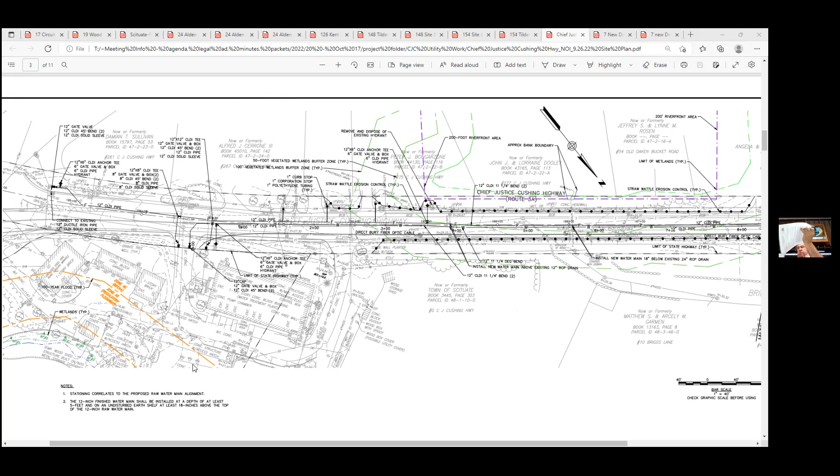So now we are on to Seven New Driftway, I think, and we should have someone from McKenzie, maybe. Yeah, Eric Shoemaker, that's me. Art Allen is also on from our team, and Brad Holmes is on the call if necessary.

We've talked about this quite a bit, so I'm not sure Eric or Art really has much to say at this point, because we've met about this project quite a bit. We were just waiting for the planning board to close in on the stormwater review and get the final tweaking done on some of the final considerations they had. And that has been done. So Eric, you can explain that, but I don't think we have a lot to talk about here. We're really just here to close and talk about some conditions if you want to.

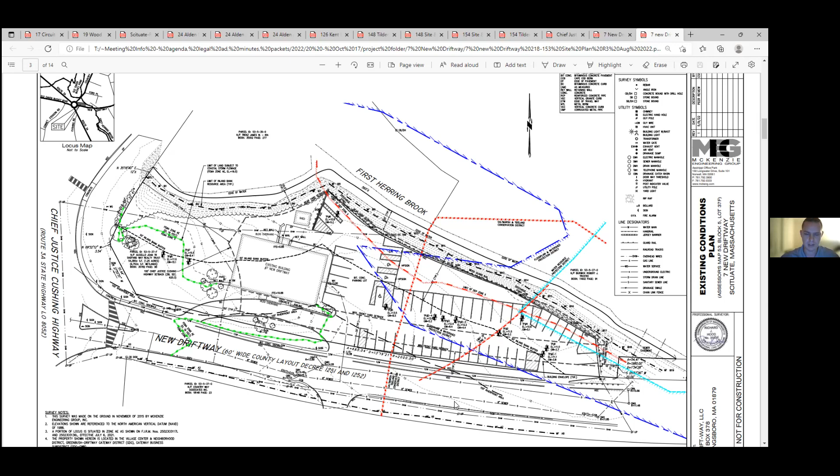Yes, so Eric Shoemaker, McKenzie Engineering. I'm here with Brad Holmes, our wetland scientist, as well as Frank Polak, our client. I just want to provide an update on the project. So you'll see on the next page, sheet C1, the proposed site layout plan, just to catch up the commission members with the changes we've made. This is an older plan, but the changes include level spreaders, which were added to the outlet pipes coming from the rain garden, as well as the roof runoff.

The peer review engineer also wanted that loading space to be 30 feet in length to accommodate a box truck, so that 20-foot striped loading space in the westerly portion of the parking lot was extended another 10 feet into the landscape area adjacent to the patio to accommodate that turning movement. So those were the latest revisions to the plan, and we'll answer any questions and help with the discussion.

Okay. This is going on a while. I don't know, Amy, are you ready to comment? I think Jen was trying to.

Yeah, so my comments are that we've been good with this project for a while. We were just waiting for the stormwater to meet muster with John Chessier's review, and it has, and finally all the tweaks were tweaked, and planning board is getting ready to get a special permit for this project, although my understanding is they have not yet done that, but they're quite close, which is great news.

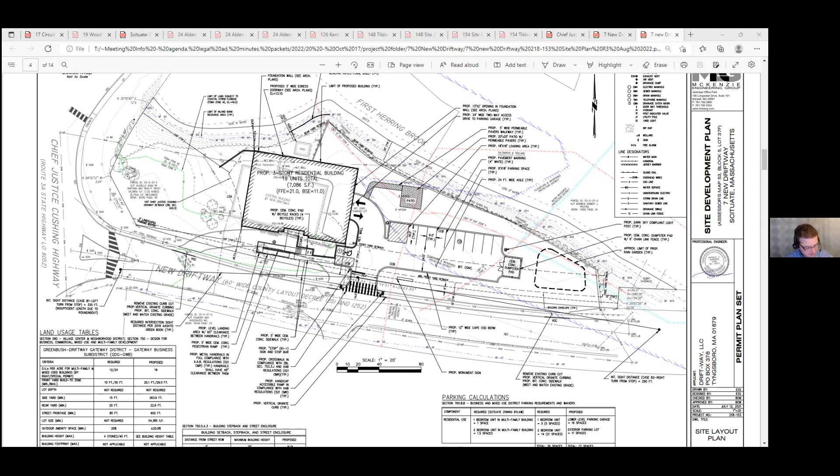Thank you. All right, 19 Wood Island Road. Someone from Cavanaro.

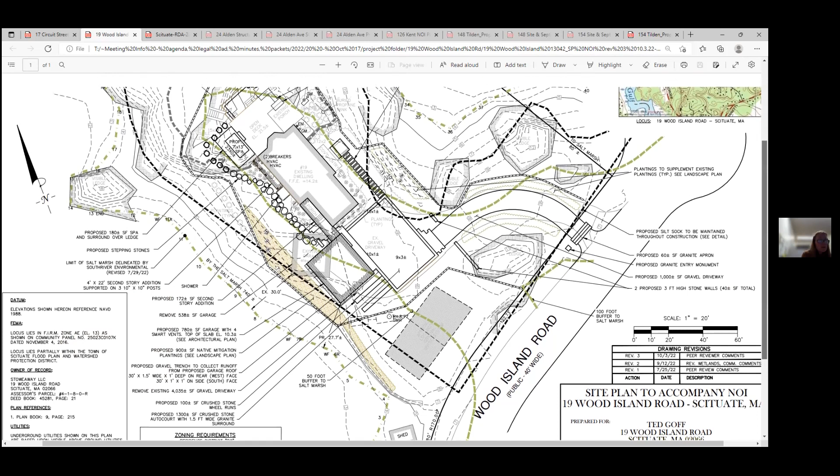We have Caroline on from Cavanaro for this project. So Frank, this project is a continued project also, continued from September 26th, which was continued from a date in the summer, while we've gone back and forth tweaking certain things of this project. This project also has a landscape architect - I'm going to unmute Sean Papich. Sean's on the call. And Art Allen from Ecotech is your peer reviewer, and he's also on the call here. So we'll have Caroline just review what has been done since we last met.

Okay, hi everyone, can you hear me okay? We can. Good evening. Good evening. Just for the record, my name's Caroline Reese, an engineer at Cavanaro Consulting, or now Merrill Engineers. I'm representing the homeowner and applicant, Ted Goff, for an NOI for improvements to a single family home. And I believe Ted may be on the call and may want to participate, at least in the discussion. Okay, so Ted, maybe raise your hand or let us know.

Sure. I don't know if you recall this project that we presented August 1st. At the time we originally presented, there was a comment from the peer reviewer to revise some of the wetland flags or relook at them, and we had not had time to do that. But we did present in August and we're able to get some feedback from the commission, and we've tried to address as best as possible the concerns about work in the 50. So the plan before you is the revised plan.

When we did reflag the wetlands, they did encroach on the developed property more. Now 75% of the lot is within the 50-foot buffer, which is that first thicker green line, and pretty much the entire lot's within the 100-foot buffer. So if you can see, right over the road is the 100-foot buffer. So the area we had to work with outside the 50 decreased.

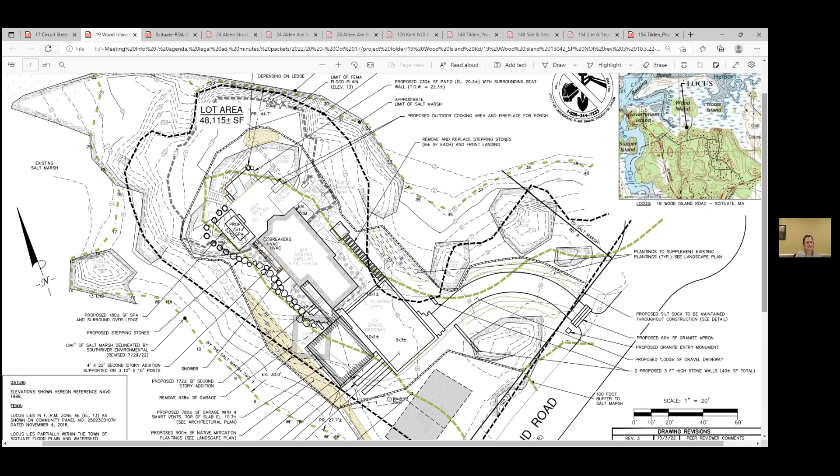We did increase the mitigation plantings just south of the garage to 900 square feet, making a long strip on the south side of the garage as a concession. We also added a gravel trench on the rear and south side, because there are no roof leaders on the garage.

So those trenches would collect runoff from the roof. Another concession: we reduced and changed the auto court in front. It was originally proposed as a 1,900 square foot paved auto court, out of the 50, but we reduced it to a 1,300 square foot gravel auto court with granite slabs around it to contain the gravel, so it lies completely outside of that 50-foot buffer.

The driveway approach is on top of the existing approach, which is tough to see in the light gray line, but it is narrowed to what we feel is a reasonable width. So the existing gravel driveway will be reduced in width and size to approach the auto court.

Another feature the client was really interested in keeping was that patio toward the top, right under the lot area. That's completely over ledge, built on top and over ledge.

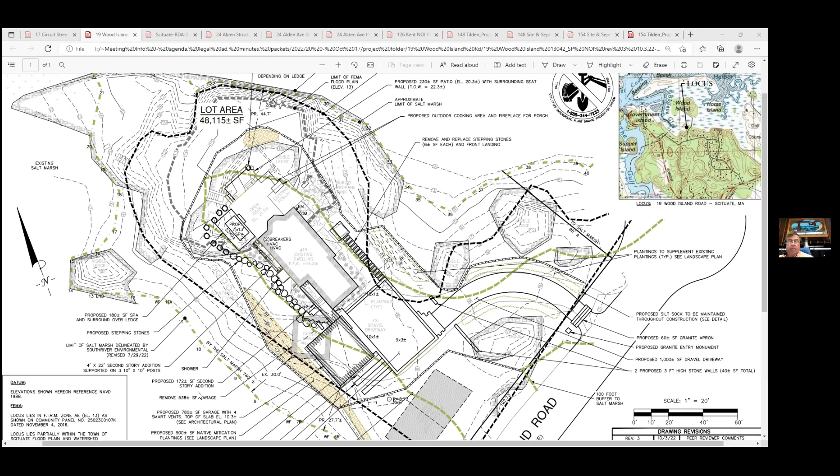Keep talking, Jen was trying to see whether she could do it. Does anybody else want to, any other commission members want to add anything to what they already did?

Somebody's scraping something.

Open deck, open deck. So is that what exists now? Maybe somebody can comment on that. The footprint looks like it. Is this the COC plan?

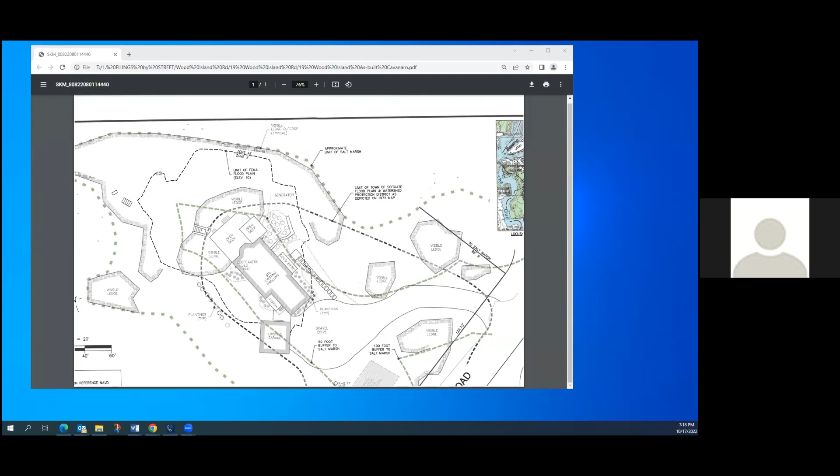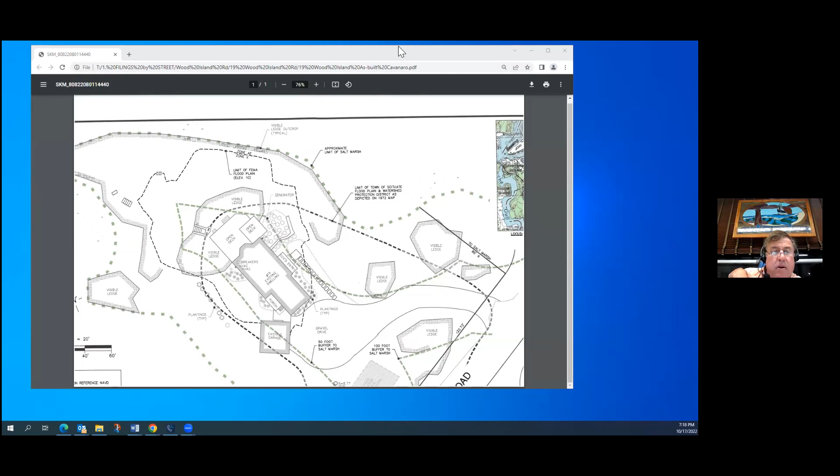And then the existing garage protrudes, that's being removed and squared off, so the new garage...

Can we go back to that plan? This is the new one. All right, but the...

All right, can you explain the difference in the wetlands lines, what you came up with versus what they started with? Yeah, uh, you're talking to me, Frank, correct? Yes, Art Allen, please. Yeah, Art Allen.

So, based on what I saw out there and comparing the older plan to the current conditions, very likely the wetland encroachments - I'd be inclined to say that the wetland encroachments are largely due to changes in that average sea level. This is that kind of site where you're gonna see those encroachments over time, 10, 20 years. So I would say by no fault of the original delineator, it's very likely due to sea level rise that would explain probably the changes we're seeing out there.

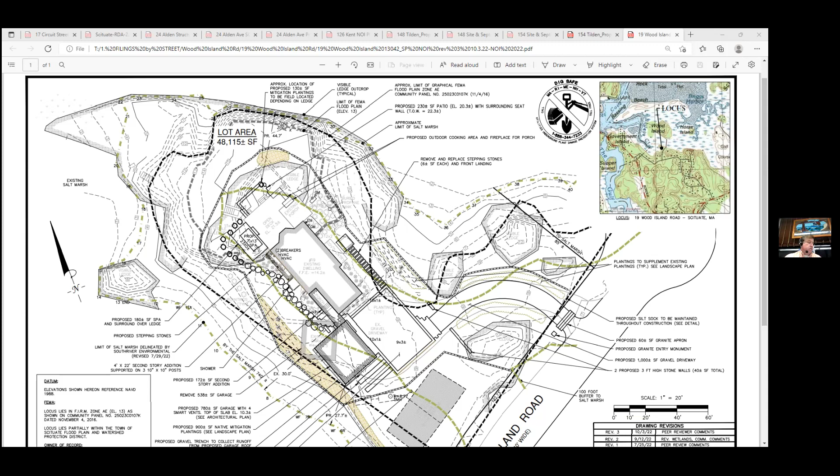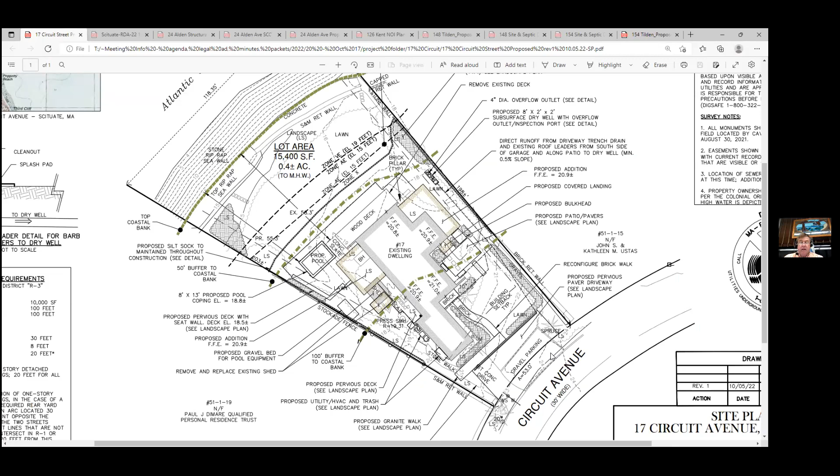17 Circuit Ave. On October 17th, 2022, 6 p.m. at the Town Hall, the Scituate Conservation Commission will hold a wetlands hearing under Chapter 131, Section 40 of the Massachusetts General Laws and Section 30700 Town of Scituate Code of Bylaws, regarding the application of Patricia and Michael Brodigan for work related to constructing 2 additions and a pool, hardscape, and landscape improvements at a single-family dwelling located at 17 Circuit Ave, Scituate. Abutters and other interested parties are invited to attend. Information to access the virtual meeting is available on the agenda posted on the town website.

And who do we have? Brendan Sullivan with Merrill Associates.

Brendan, just before you do that, I want to make one note. I don't have any interest in this project. I do pretty substantial work on the home adjacent to that project. Years ago, I worked on this home when it had a prior owner, so I'm pretty familiar with it. But I do quite a bit of work for the abutter, and I want the applicant as well as anybody else to know that if anybody thinks I can't be objective in this hearing, they could certainly let us know.

Okay. Brendan, very good. Thank you, Chair. Brendan Sullivan with Merrill Associates, here with the owners, Michael and Tricia Brodigan, as well as Sean Papich, the landscape architect. So this is Circuit Ave out on First Cliff, number 17.

It faces northeast, almost towards the lighthouse, towards the mouth of the harbor, to the Atlantic Ocean. Existing single-family home. They're proposing two additions in the rear: one is basically a screen porch on the rear left, and a two-story addition on the rear right. There's an existing shed they'll be relocating, and also a rear deck in the back, as well as a small plunge pool, an 8 by 13 plunge pool, that'll be built within the deck.

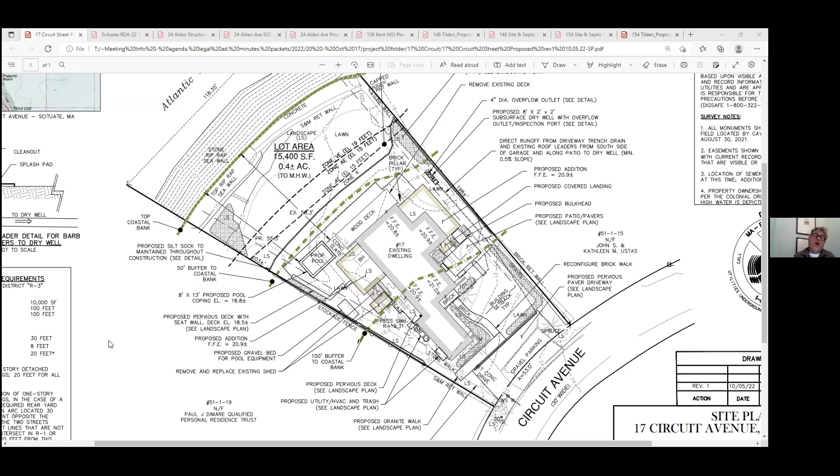What we were intending to do is fill that whole area. Right now it's a substantial amount of brown mulch, and as landscape architects we can't help but fill it with something else. We were intending to put some beach grass there and Rosa virginiana, which is a native rose. There is some existing rugosa rose, which we were leaving in place unless you want us to remove it and put in native Rosa virginiana.

We're also adding back some seaside goldenrod. Those are doing really well on the water right now. Any of those species we just talked about are performing quite well. We've also got some sweet gale, which is essentially a smaller cousin of the bayberry, that will also be going in. So really hitting those four plant types to fill in the areas that are currently bed, and keep some amount of the lawn in back there. That's really their gathering space.

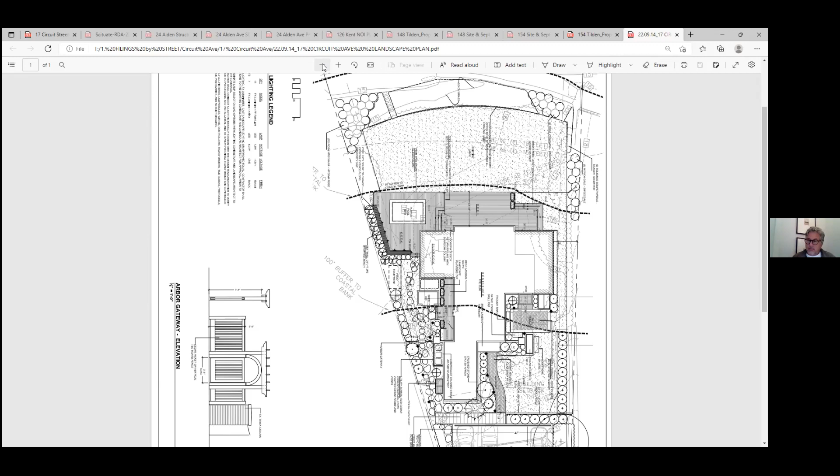Okay. I don't have any other questions. And I think we've asked anybody in the audience. Yeah, and any other members have anything else to add?

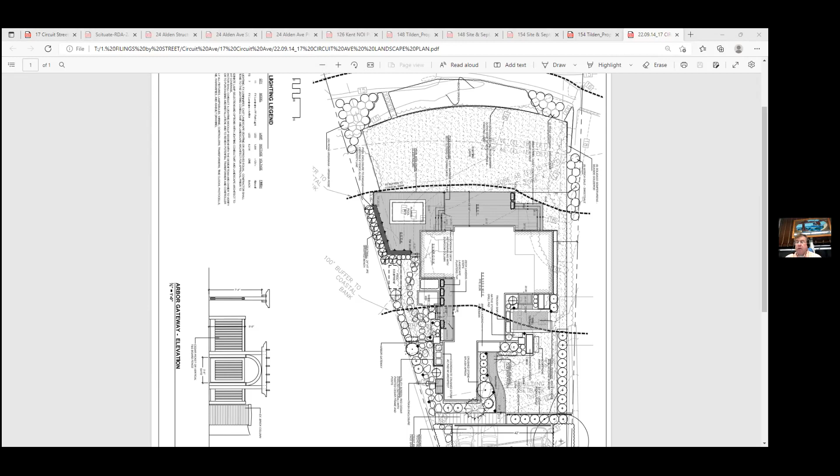148 Tilden Road. This is continued from September. And this looks like Morse Engineering is the engineer, Greg.

With the new plans, Brad Holmes raised his hand. Okay, can we do 148 and 154 together? Yes, I think that would move things along a little bit.

So what we were gonna do is, Frank, you and I talked about this beforehand. That was a couple hours ago, Amy. Yeah, sorry, and we want to speak to Art.

We've got Greg on the call here. We don't have revised plans, but we did get a mitigation plan. I don't think we've got revised drawings, but we did get a mitigation plan. We don't need a new presentation. I think we were just going to have you guys talk, hear from Art, and go through the commission pretty much.

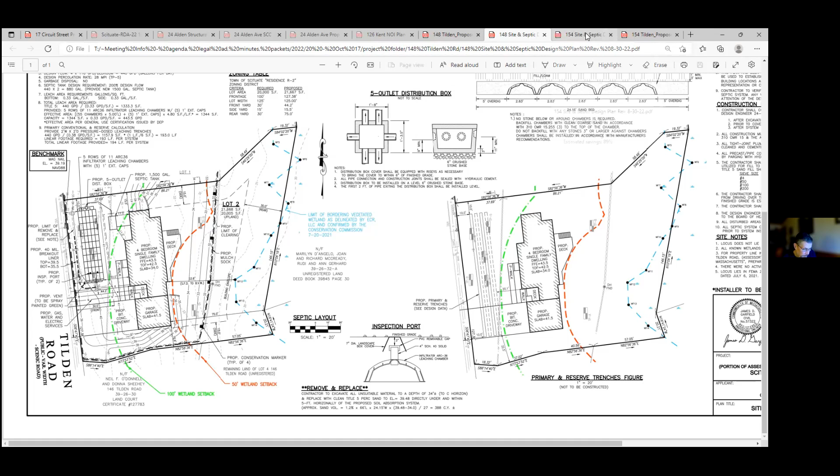They show a water quality swale at the end of the proposed drain line expansion on 154 Tilden. I recommended that they detail that proposed swale on the plans, on the NOI plans.

I had some comments on the invasive species management work, just that it'll need to be carefully supervised. I recommended that cutting should only be done by laborers on foot with hand tools or power saws. No wheeled or tracked equipment should be allowed within that buffer area, the invasive management area.

And I recommended special conditions that reference the mitigation plans and require inspections by the commission or their agents whenever invasive species are marked prior to removal, and then after removal, to ensure that the cutting and associated disturbance is minimized. So those are my comments on the revised plans to date.

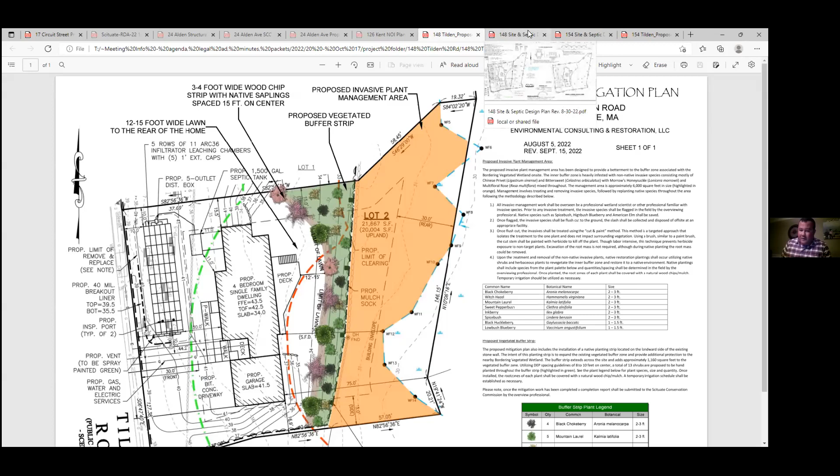At 148 Tilden, which is lot 2, we're proposing 1,003 square feet of lawn inside of the 50-foot buffer. For mitigation, we're proposing 1,427 square feet of plantings in front of the stone wall, as well as 6,088 square feet of invasive species mitigation. We also have plantings between the 50 and the 100-foot on this lot, which comprise 688 square feet. You'll notice that all of the proposed house is outside of the 50-foot buffer zone.

On lot 1, 154 Tilden Road, the lawn area inside the 50-foot buffer is 541 square feet. The plantings in front of the wall comprise 1,844 square feet. The invasive species removal area is 3,898 square feet. And again, we have additional plantings between the 50 and the 100-foot buffer, which are 756 square feet. As with lot 2, all of the proposed house, the utilities and everything are outside of the 50-foot buffer zone on this lot as well.

I'll turn it over to Brad. He's really been the one spearheading the mitigation and Mr. Allen's review. Brad? Thank you, Greg.

To add on to what Greg and Art explained, I agree with Art. The conservation marker should be at that landward edge of the mitigation planting facing each site. That was more of a typo oversight, so we'll correct the plan on that.

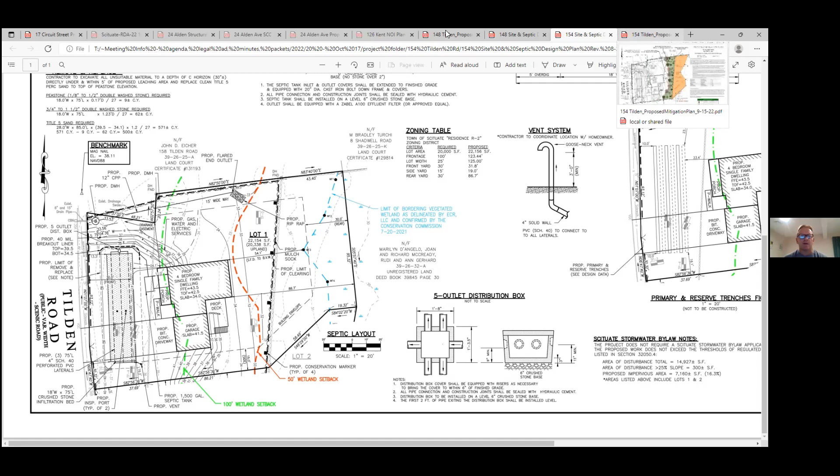And the water quality swale, I can work with Greg Morse to get a design on that swale to get more detail. But I'm in agreement with those aspects. The design is prepared so that we have a nice mitigation planting strip with the backdrop of that stone wall, but we're also including more of a native landscape strip of saplings that will be pleasing to look at, so that people won't want to go beyond that area. Those conservation markers will be a reminder, but I'll leave it at that. I think you don't need too much more description because we did get a chance to review it on site.

If I could just add to that real quick, this is Greg again. Moving the markers to the development side of the planting area, that could certainly be conditioned if the commission chose to do so. And with respect to the water quality swale, we are working closely with DPW, as this is a DPW drain that discharges onto the site. We would size that in accordance with their standards and require their sign off. That could be conditioned as well, that DPW have final review of the swale. It's not so much a swale as it's essentially just a riprap discharge at the end of the existing pipe that gets extended.

Okay. Amy, what do you want to add to this? I don't have anything to add. Okay.

Penny, you've been out there in the bushes. Yeah, I like the mitigation. I don't like the 50-foot. Oh, I don't know what to say. Here we go again, getting into no touch zones.

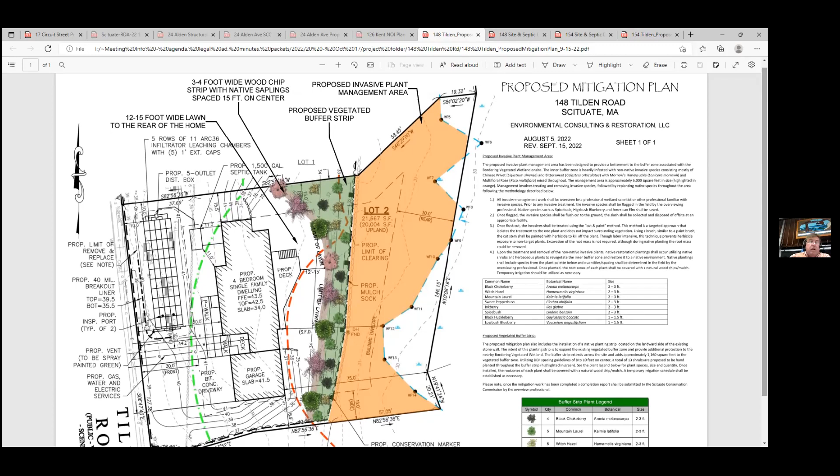So do you want to, I mean, they don't have a yard, well, they have a front yard. The other consideration is, do we look for more planting of trees? Essentially everything from the street to the stone wall, or at least to the planting area, is going to get cut down. So do we want to see some additional decent trees planted in the front yard of both these homes as mitigation?

I guess I'd ask Brendan or Andy if they want to address that. Brendan's looking at me. Yeah, Andy. He got on the hot seat last time. So yeah, you're up, your turn.

We're basically gaming out a future situation that's a little unpredictable. I don't think it does for me. I think I'm ready to take the chance on holding the 50, personally, but that's where I am, just as one individual on the commission. No, I get it.

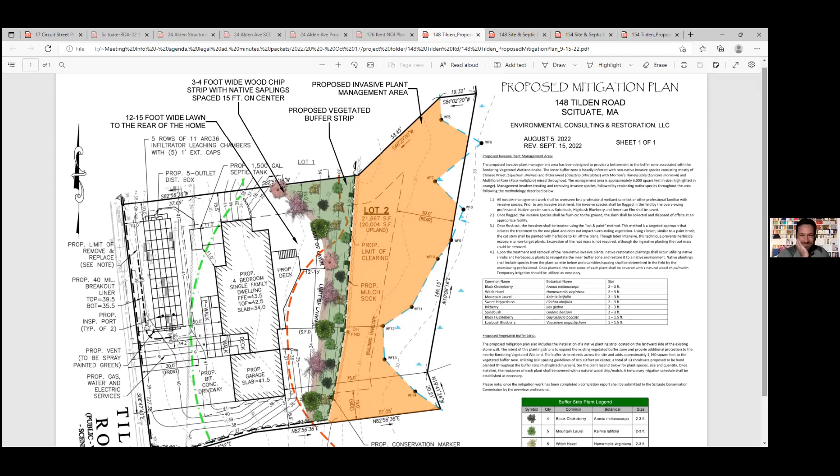Can I speak, Frank? Yes. Okay, this is pretty much for Andrew here. Steve, you're going to have to spend a little more doing this mitigation.

Can you not hear me? You're breaking up a lot, going in and out. Yeah, I'm in Norwell, that's the problem, we have lousy service over here. Sure you're not in Mars? We're getting every third word if we're lucky, Steve. We cannot hear you, Steve. You're gonna have to go somewhere else, I hate Zoom. I'm gonna call Greg Morse right now. All right, I'll put Steve on speakerphone and hopefully that can transmit through in a minute here.

Steve, I'm putting you on speakerphone. Okay, hopefully the commission can hear me now. We can, yep.

Hallelujah. I just want the community members to understand the reason we're putting all these mitigation plantings in is because we're trying to stop people from going further towards the wetlands. If we didn't put the lawn area in the mitigation, once these houses are built, they'll probably think they want to clear to the wall, because you've seen what the site looks like down there. We're trying to do a real nice planting plan so it won't be disturbed.

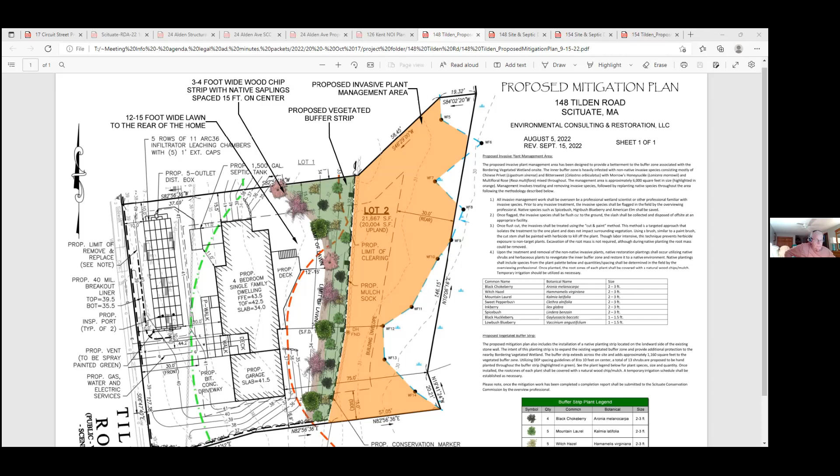All in favor? Andy, I'll stay with my no. Okay, Brendan? I'll say yes. Okay. And Frank, yes. All right, and is that for both? Do we do that for both? Yes, yes, she did. Okay, all right.

Thank you, thank you. 126 Kent Street.

On 10/17/22 at 6 p.m., the Town Hall Scituate Conservation will hold a wetlands hearing under Chapter 131, Section 40 of the Mass General Laws and Section 30700 Town of Scituate Code of Bylaws regarding the application of Hadley and Andrew Gorham for work related to raising and reconstructing a single-family dwelling at 126 Kent Street. Scituate abutters and other interested parties are invited to attend. Information to access the virtual meeting is available on the agenda posted on the town website.

For the record, Gregory Morse, registered engineer, Morse Engineering, representing the property owner and applicant Andrew and Hadley Gorham. This is an NOI for a raise and reconstruct of their single-family home located at 126 Kent Street. Depicted on the plan here is the property. It's 30,657 square feet in size, entirely upland land area, with the exception that the front half of the property is located in the FEMA floodplain. The floodplain exists at elevation 14. For reference, Kent Street, at the bottom of the page, is at elevation 10. The topography at the back of the lot, at the top of the page, is approximately elevation 17.

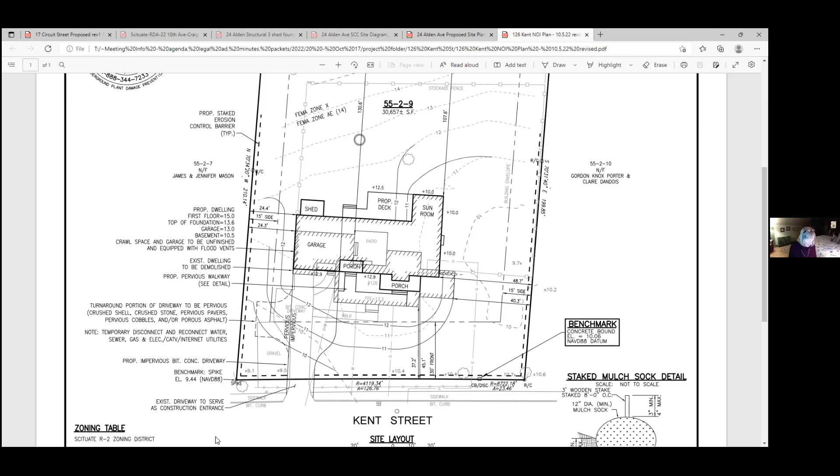Penny: I got spoiled last meeting, I had to do it. You weren't there, that's right, I was at CPC, dear. You were, 24 Alden Ave, asking for money.

10/17/22, during a 6 p.m. meeting, Scituate Conservation Commission will act on the request of Mr. Walsh for a determination of applicability of the Massachusetts Wetlands Protection Act and the Scituate Wetlands bylaws for activity related to constructing a platform for a generator and constructing a new shed at a single-family dwelling at 24 Alden Ave, Scituate. Abutters and other interested parties are invited to attend. Information to access the meeting is available on the website.

Do we have anybody? Good evening. I'm Heidi Condon from HC Design representing Mirza Walsh, the new owner of this property. I'll quickly walk you through.

This is an RDA because all we're doing is requesting a platform for the generator, and I did receive structural drawings that I sent in today. They were just late from Rivermore, so I'm not sure if everyone got them. But it's an independent structure here and it will be at elevation 19, so it's out of the floodplain and 2 feet above.

We are also requesting a shed, and I was in discussions with the building inspector, Bob Vogel, last week, and we have reduced this to a 10 by 10 shed, which is an approved size by FEMA and does not require to be raised, though it does require to be anchored. You should also have, from what I sent this morning, an anchoring structural system also from Rivermore, so that the shed will not float away in the event of a flood, and it will also not have a wind load issue. So we've kind of addressed both of those. So this now, instead of 15 by 18, will be a 10 foot by 10 foot shed.

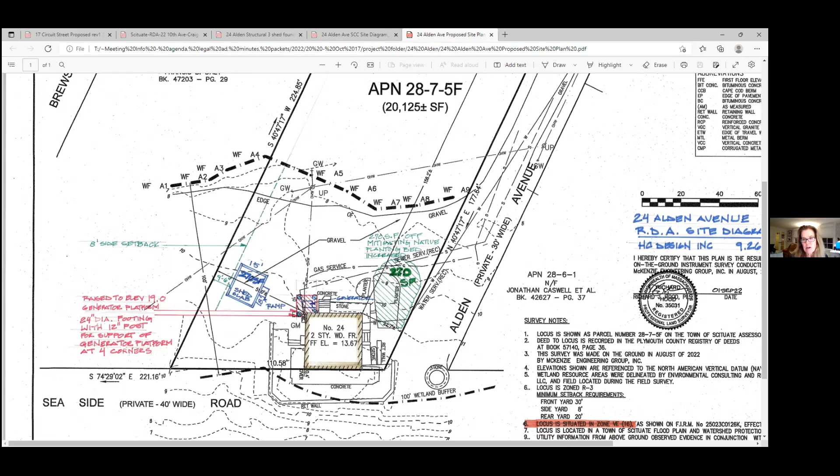So I think Heidi, can you just elaborate a little bit? You said before you've got a letter from Rivermore. What's the elevation of the shed and how is it constructed? I'm not sure if any of you got the drawing I sent this morning, we've made it much smaller, it's a pre-made shed. There should be one more, that's the shed foundation plan here. So we've made it smaller, it's right here and it's 10 by 10.

When I spoke with Bob Vogel, he said a 10 by 10 shed is allowed by FEMA and it does not need to be elevated, but it still needs to be anchored. You can see there are still 4 concrete piers that will be installed, and the actual shed can then be anchored to the piers. That's a requirement by FEMA. Once it's anchored, it will be protected from wind so it can't blow away, and it also will be anchored so in the event of a significant flood in this area, it can't float away either.

So Bob said this is completely compliant. We are putting the generator at elevation 19, that's also by code, and as you can see we have it 2 feet up. We blew this one up, it was so hard to see on the other one. It's really an independent structure, so it's not tied to the actual building. And then this is where we're proposing the mitigated planting. There's already native planting in here, and we're just going to add some planting there.

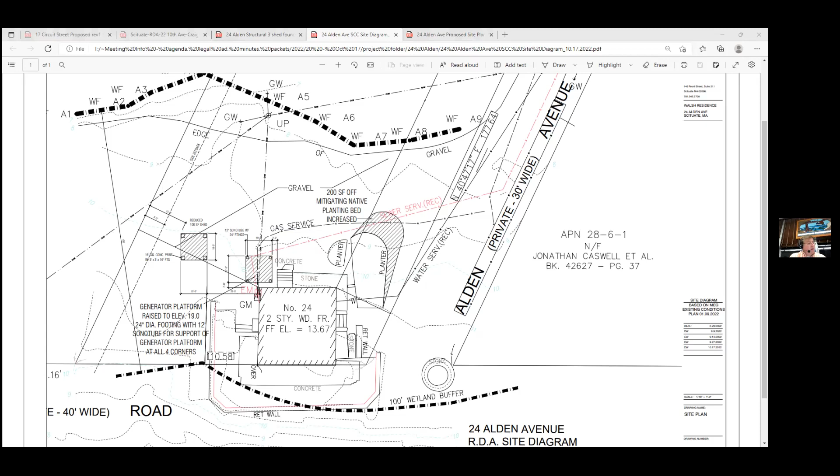On 10/17/22, during the 6 p.m. meeting, the Scituate Conservation Commission will act on the request of Craig Berry for a determination of applicability of the Massachusetts Wetlands Protection Act and the Scituate Wetlands bylaws for activity related to extending an existing deck and new footings of a single-family dwelling at 22 10th Avenue, Scituate. Abutters and other interested parties are invited to attend. Access to the virtual meeting is available and posted on the town website.

Okay, do we have somebody on for that? Yeah, whoever's on for this project at 22 10th Ave should raise their hand. Deck footings, oh here we go. It's a phone number, 508. Hold on, we're going to unmute you right now. Okay, you should be on. Hello? All right, yes, good evening. Are you on for a Scituate Conservation hearing? You're on now, sir, you're unmuted if you want to speak. The phone number is unmuted for the conservation hearing if you want to speak, sir.

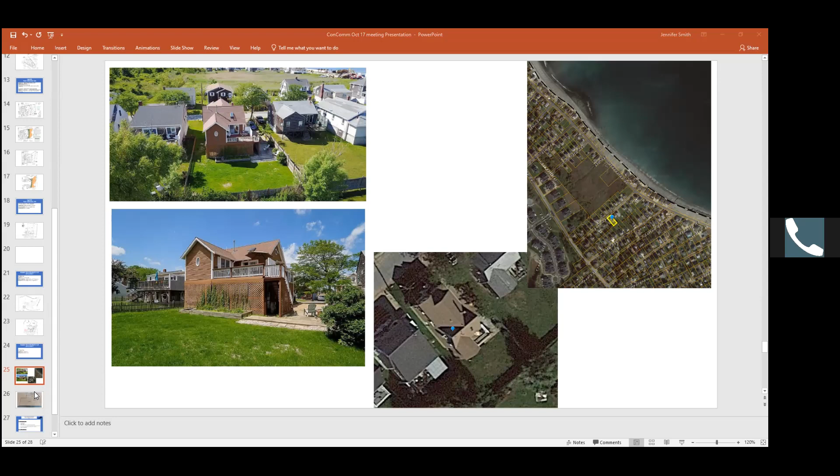So there's an existing deck on the back of the house that's gotten to the point where it's in rough shape, so we're going to have it rebuilt. The request is that we're going to try to extend it 6 feet towards the backyard, and we're in the flood zone, so that's why the request is being made. There'll be 3 footings put into the backyard that are not currently existing there. From side to side, the width will be the same, the only extension will be the 6 feet further away from the house. Great, that's the basics of it.

Stay on the call, sir, because we have questions. Sure, I don't really have much comment, the photographs speak pretty clear on to the project location. It does get a little bit wet here. Oh yeah, we go underwater. It appears consistent with a negative finding for an RDA, so I think this is okay to approve this way.

Yeah, he was talking about putting tubings down, yep, sonotubes. I mean, sometimes it's sonotubes, they also make pre-made ones that can get dug in, so I think the building inspector will make sure he's got adequate footings. Yeah, sometimes they do those diamond piers too. Is that okay, Richard? Yep. Penny? No, I'm all set.

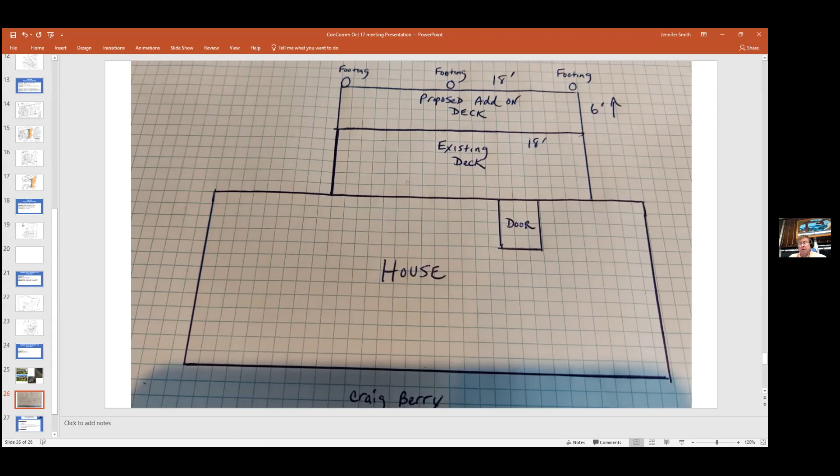So you're all set. We voted to approve it and then there'll be a little bit of paperwork. Okay, much appreciated. Thank you, have a nice night.

Okay, what's left here? Administrative items. So, we're not going to vote on 327 Central, because we're waiting for a Board of Health on the Title V system, so we don't have the approved plan there, but you could vote the orders for the Jericho Road.

Jericho Road boating, want to give us a motion, Penny? Yeah, I make a motion we accept the order of conditions as written for Jericho Road boating access facility. Second, motion seconded by Richard, all in favor. Andy, yes. Brendan, yes. Frank, yes.

Toll Brothers - we talked about this last week or a couple weeks ago. I followed up on the items you wanted us to look into, the vernal pool and the conservation posts, and forwarded the response from the new senior land developer. They're working on those, still in process, just so you know they have not forgotten about them.